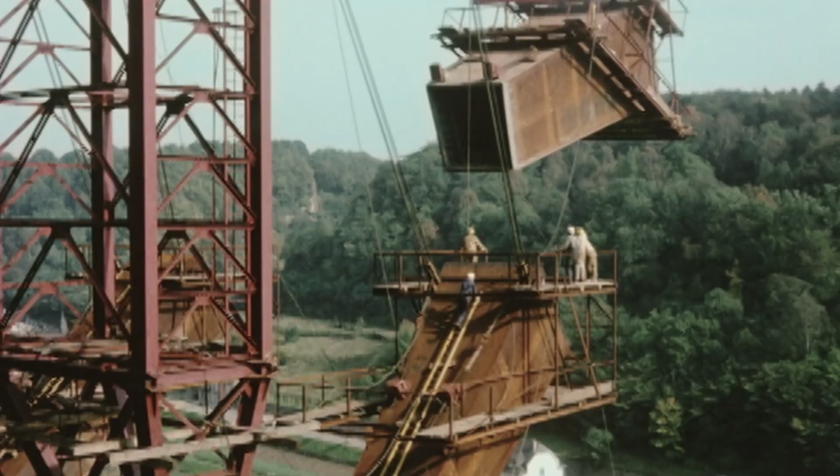Kirchberg. Since the second half of the 20th century, this plateau to the northeast of the center of the capital has developed into a significant prestigious district. In 1961, the Kirchberg Fund was set up. 2 years later, the building of the Red Bridge connected the district to the city center, the Ville Haute. As the infrastructure was developed, European Union institutions and banks moved into the district.

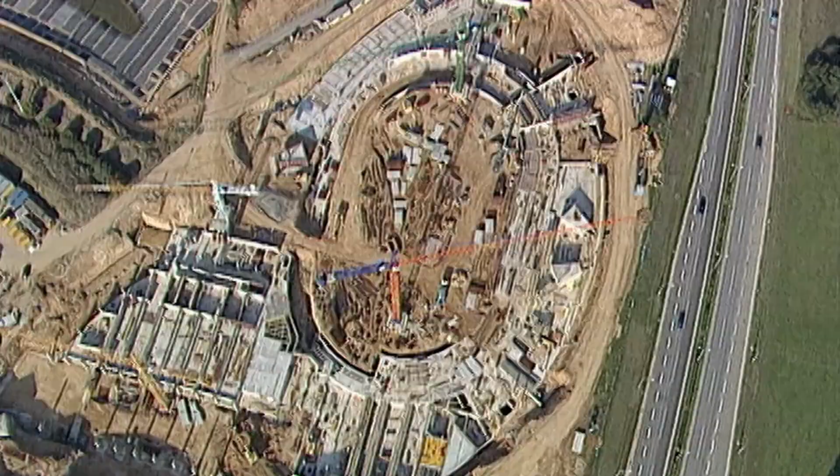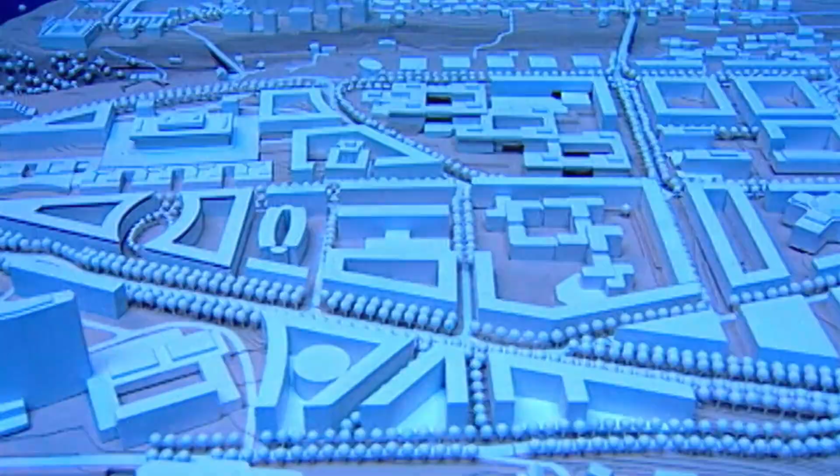In the early 1990s, the area had to be restructured to achieve an appropriate urban density. In the course of addressing this challenge, the whole energy concept for Kirchberg was also rethought. In 1997, a European invitation to tender for the construction and operation of a power plant in Kirchberg was launched. The winner was LuxEnergie, a company known since its foundation in 1990 for its strengths in the area of heating and cooling.

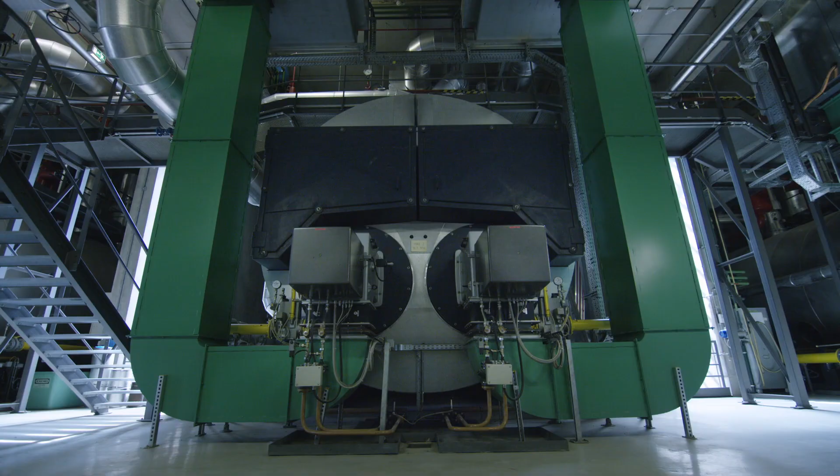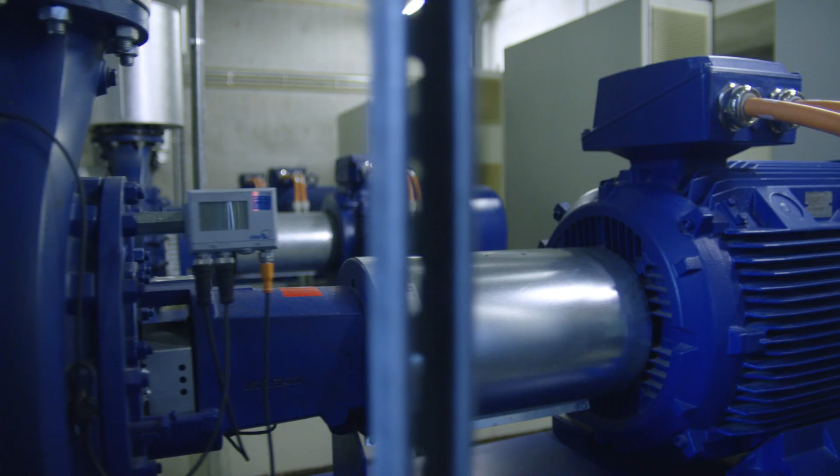The Kirchberg power plant, with its impressive chimneys, is now a feature in the district's skyline. Once commissioned, the plant supplied the Kirchberg heating district network of the City of Luxembourg via natural gas cogeneration installations, supported by condensation gas boilers. The cogeneration installations, which produce not only heat but also electrical power, fed the current generated into the public electricity grid.

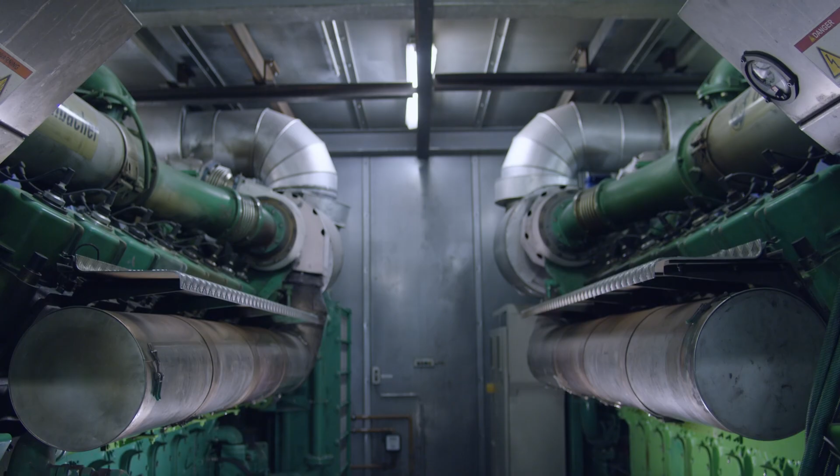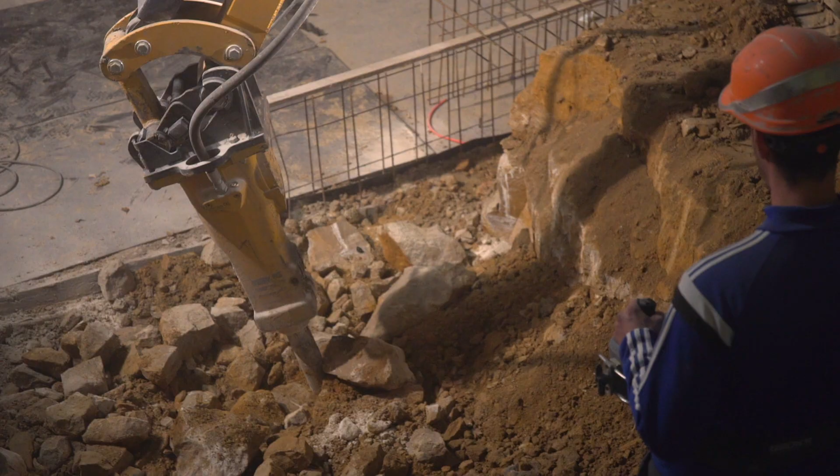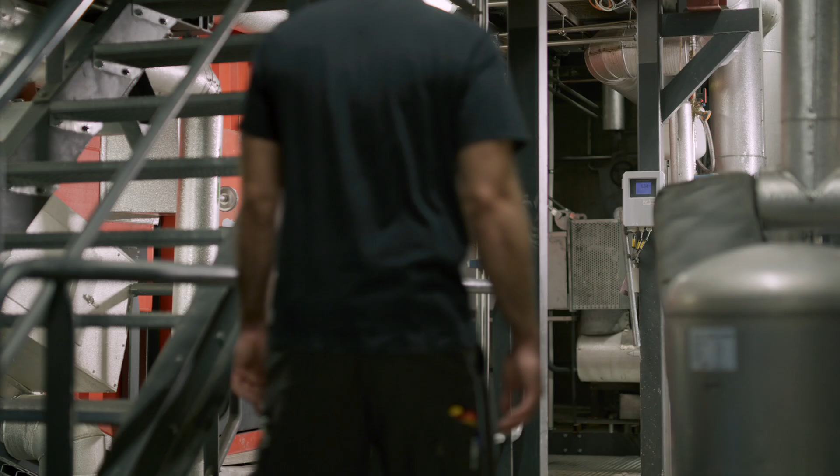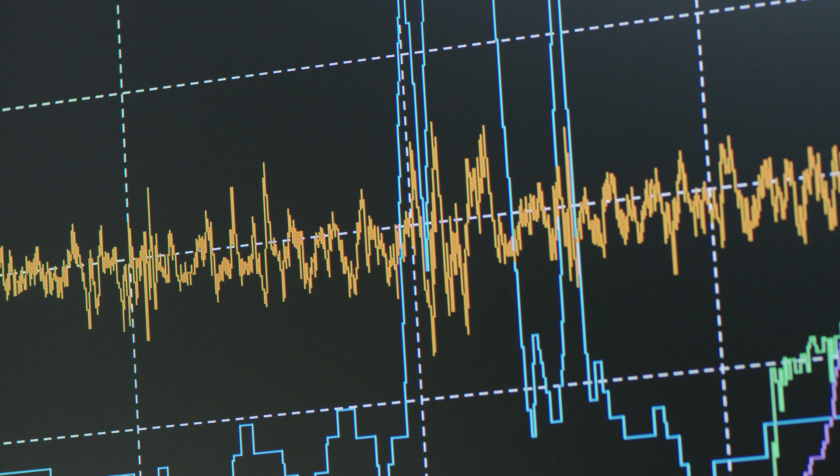Due to the growth of the Kirchberg district and the general increase of heat requirements, LuxEnergie began an initial ecological conversion of the energy plant in 2016. Since then, most of the heat has been produced from biomass, specifically wood pellets. The pellets are burnt in a cogeneration installation and the heat generated covers Kirchberg's baseload. During consumption peaks, the additional activation of the cogeneration facilities and, if necessary, the condensing gas boilers made it possible to meet demand.

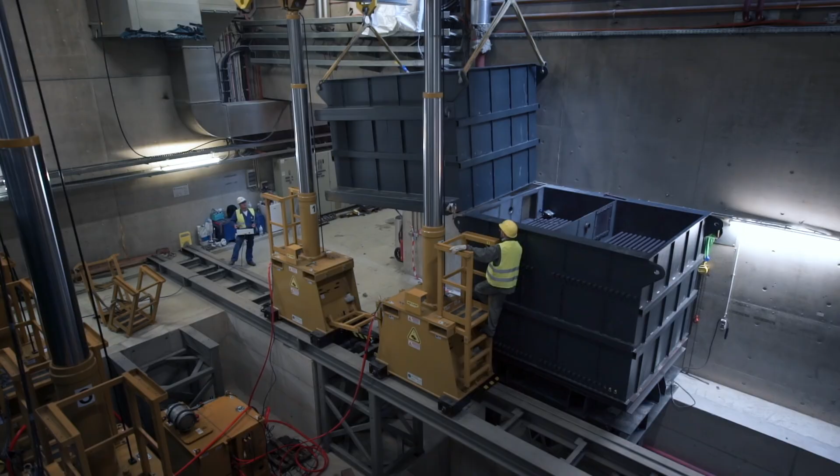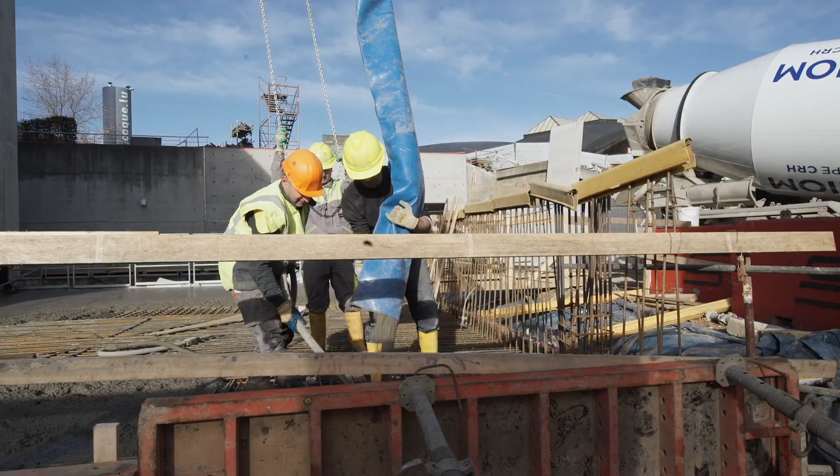The complexity of carrying out such a huge transformation while keeping the existing production installations in service should not be underestimated. Due to a lack of space in the existing premises, the silo for the new installations was built on an area next to the office block. As a result, the urban planning of the adjacent areas had to be completely reviewed and precisely coordinated with the Coque Arena and Lux Tram.

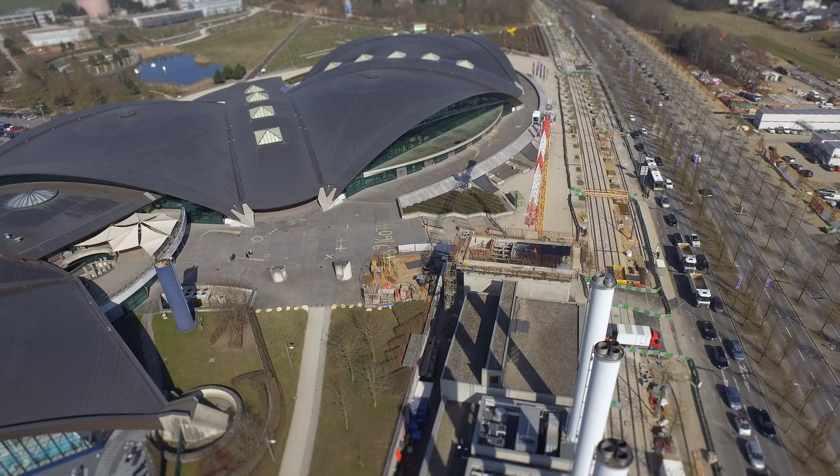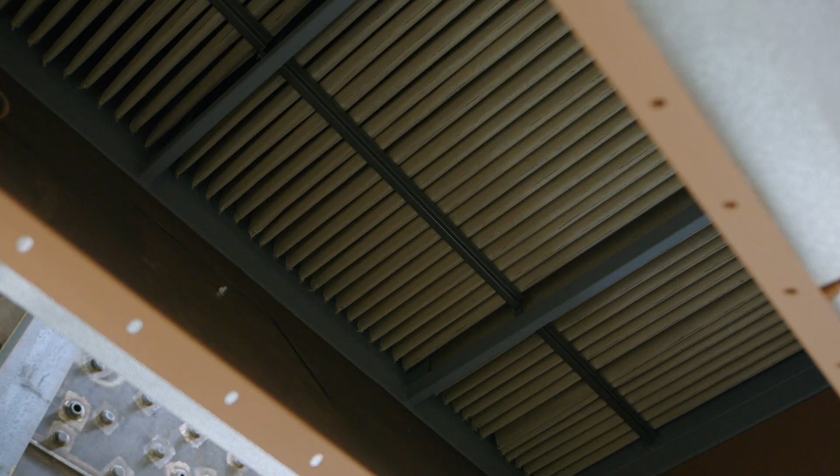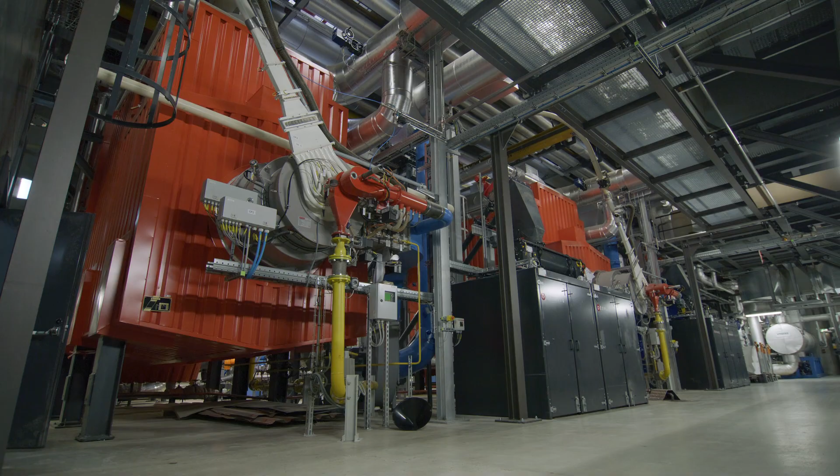In 2023, the heating plant was converted for the second time. Peak load coverage has now been made more environmentally friendly by swapping the gas-fired cogeneration units for 2 wood dust boilers with a total output of 15 megawatts.

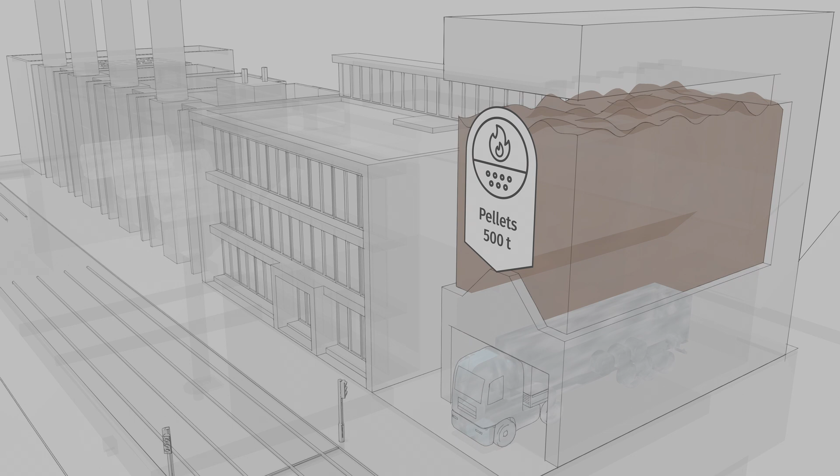So, how does this installation work? The silo allows to store up to 500 tons of pellets, which corresponds to an average autonomy of 1 week. The pellets are produced from local wood by the company Kiowatt in Roost and are delivered 3 to 6 times a day on working days. A bucket conveyor carries the pellets to the upper part of the installation, and from there they are transported by conveyor for uniform distribution throughout the silo.

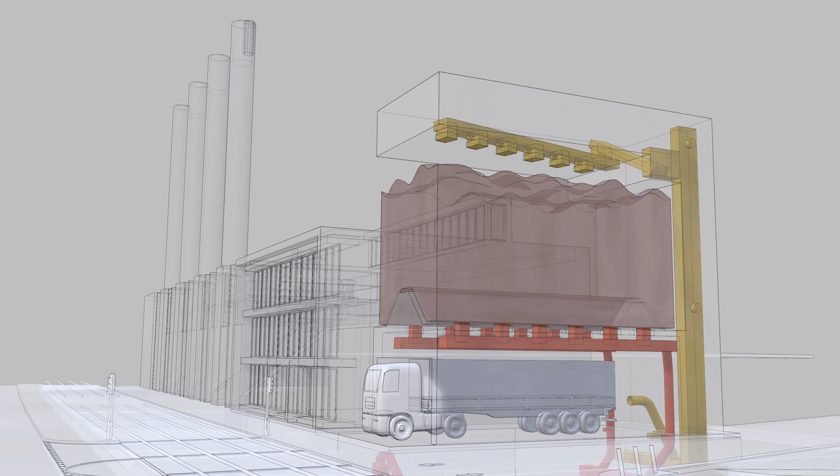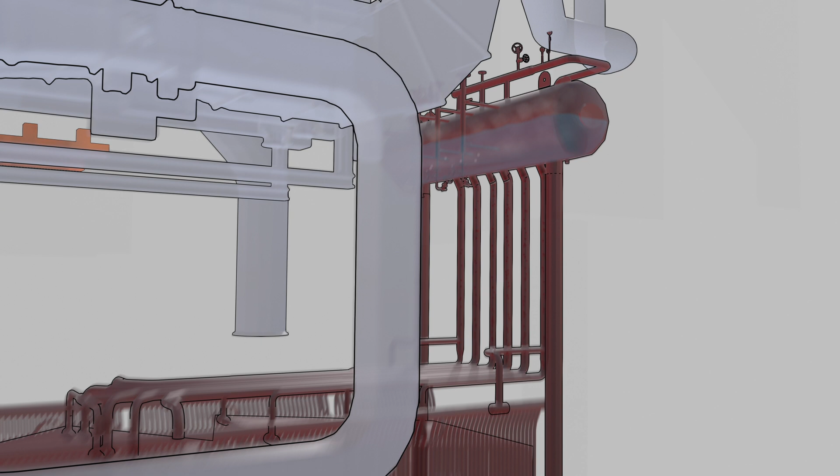The pellets then fall through hatches onto another conveyor which carries them to the boilers. Precise dosing ensures optimum efficiency of the combustion process. The boiler burns 2.9 tons of pellets per hour. The generated heat converts the water into steam at a temperature of 485 degrees Celsius. A turbine downstream from the boiler uses this steam to generate electrical energy.

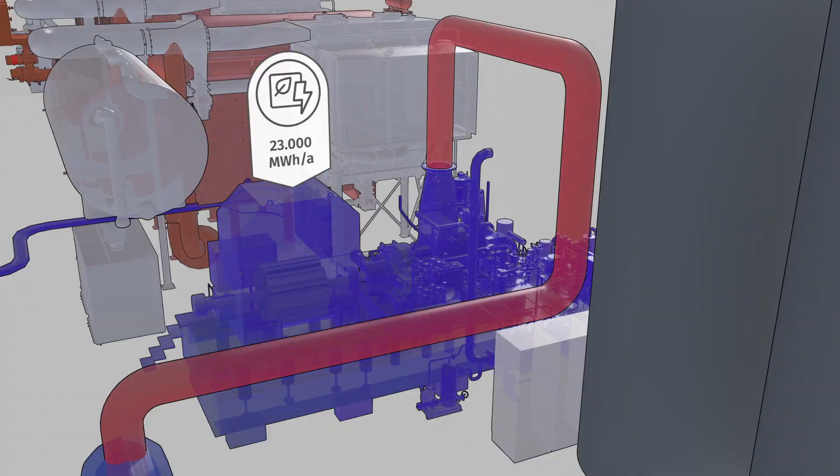This process makes it possible to generate up to 23,000 megawatt hours of green electricity per year, supplying the public electricity grid. The residual heat from the turbine is used to produce a thermal baseload of 9.5 megawatts, which provides the Kirchberg district heating network. This installation allows production of up to 77,000 megawatt hours of green heat per year.

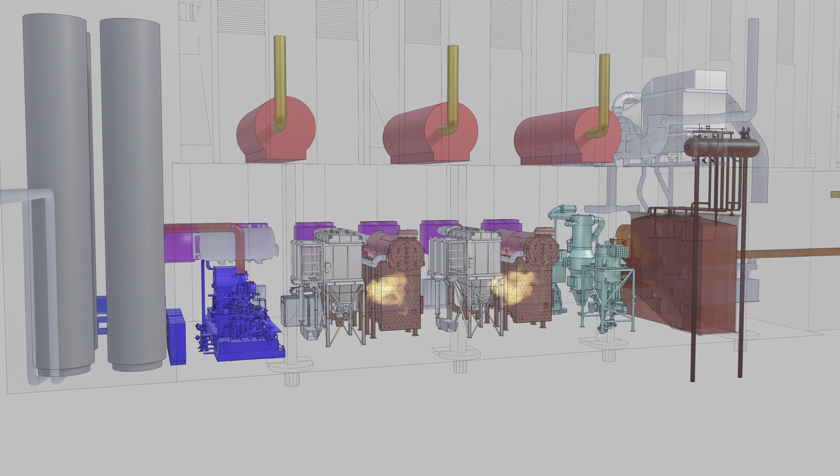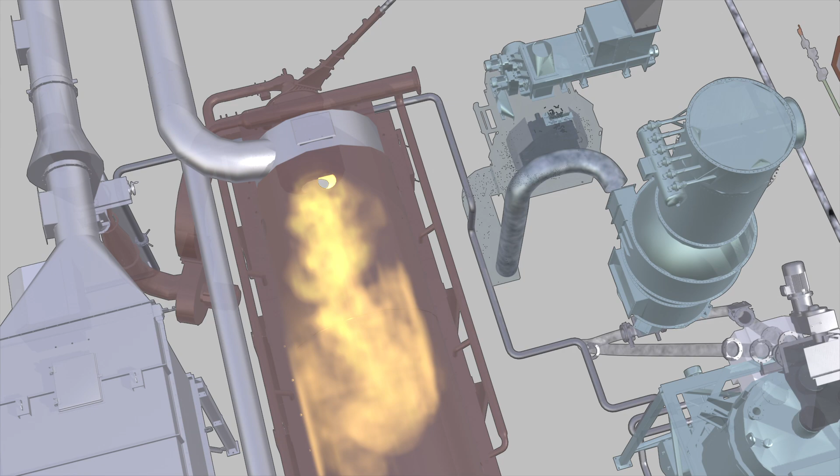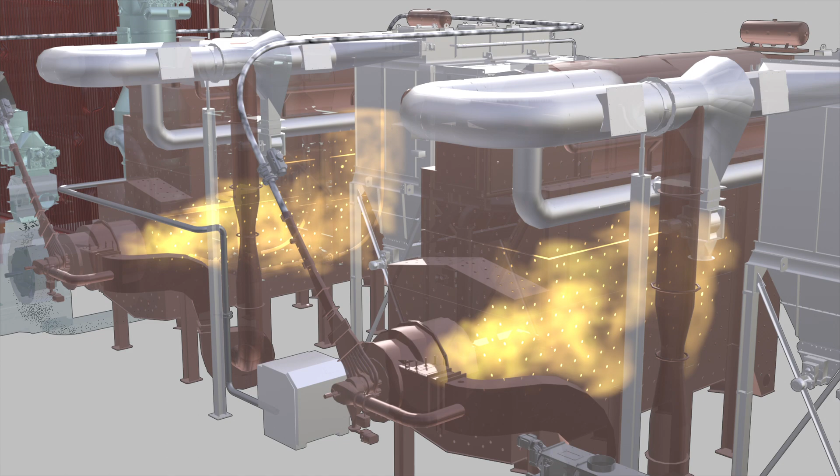As soon as the heat demand exceeds the base load, the wood dust boilers are started up. The pellets are first crushed in a hammer mill and then injected into the pellet boiler in precisely metered quantities. As these boilers are used to regulate the heating after the base load produced by the biomass steam boiler, precise regulation is required. These wood dust boilers enable precise control of heat production in a similar way to a gas boiler, by varying their load. Traditional pellet boilers have greater inertia when it comes to the need to vary output.

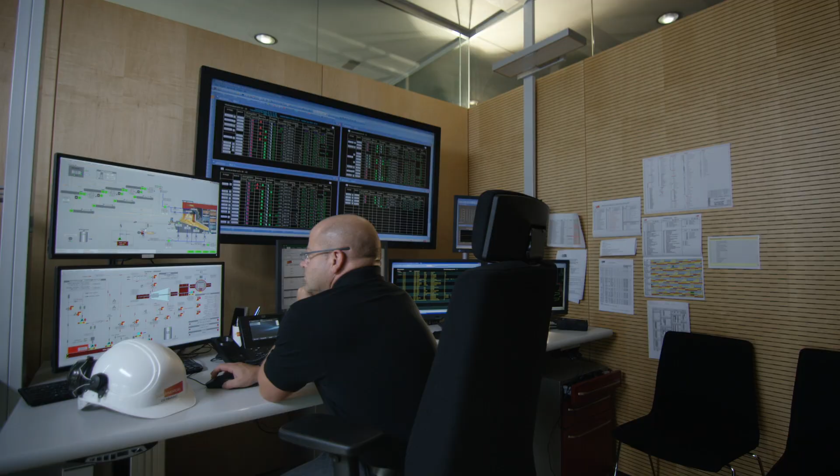The exhaust gases pass through a high-quality filtering system. Regular emission checks by accredited bodies ensure a minimum environmental impact. The ash and residues are fully recovered and stored pending recovery and recycling by a specialist company. Condensing gas boilers will continue to be used to ensure the supply of heat during major peaks in demand.

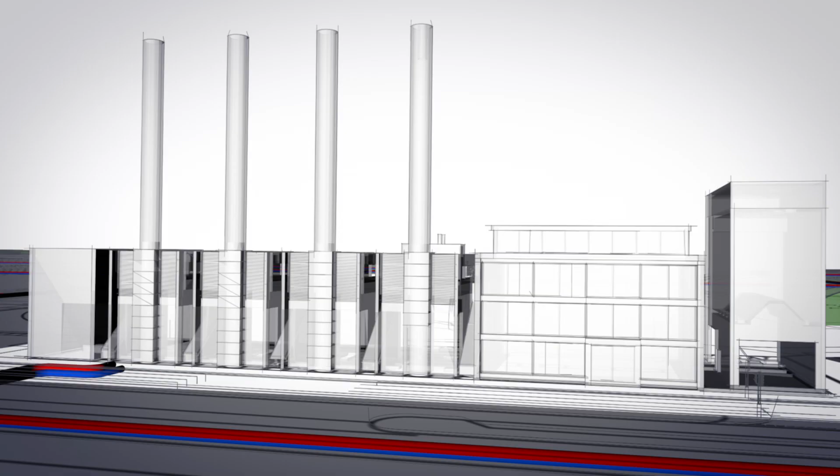These two transformations of the energy plant make it possible to save 13.8 million cubic meters of gas per year, which simultaneously means a reduction of 37,000 tons of CO2 per year. The heating network has become a green network, over 90% of which is supplied by renewable heat.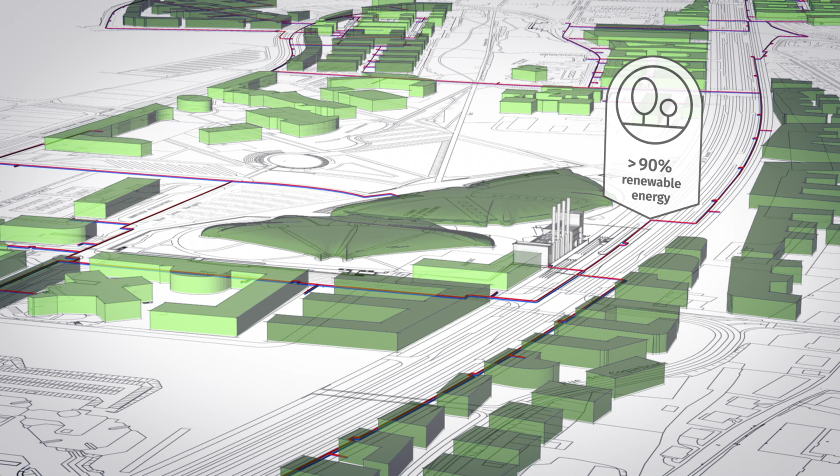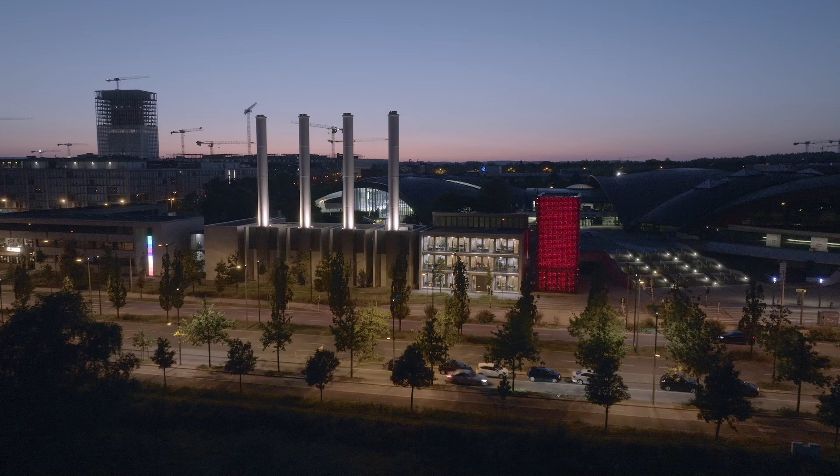With these transformations of the energy plant, LuxEnergie has demonstrated the benefits of a district heating network by converting the entire Kirchberg district to green energy. LuxEnergie is therefore delivering sustainable energy to a whole district and its inhabitants, while making its own contribution towards protecting our climate. LuxEnergie, the responsible energy provider.